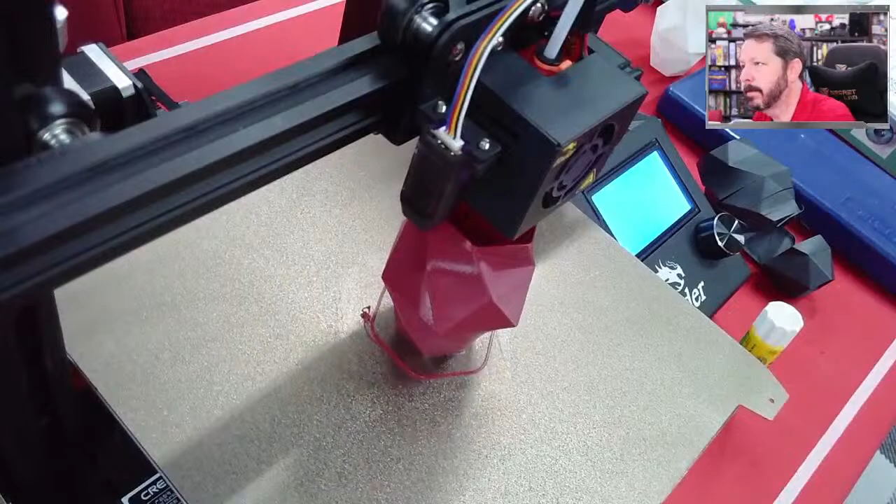So I did get out our new version—let's see, we can go back to this picture. I got our new version over here, and it printed much better. First of all, it's much darker. So it printed this guy—I'll get it over here so you can kind of see. Right now we're printing that, so that's what it looks like.

Really nice. Now, I don't know if you can tell on here—yeah, you can tell right there. So these first couple of layers, I don't know if I can get it to focus on that particular part or not. Maybe. I printed it at the hotter temperature.

One of the things I originally wanted to do was print hotter, because I thought this material needed to go up to 260 or 270, and the other material that we had printed was at that temperature. This is a different version.

Let me see if I can find the box—oops, sorry, we'll have to get our camera. There we go. That's the name of this carbon fiber polycarbonate.

And when I got to printing it at that hotter temperature, it was printing, but it's rough compared to this temperature. I wish I could get it to focus more cleanly. There we go—now I'll have to refocus it later, but this temperature here is 240. So you could print that on a standard Ender 3. It's at the upper end of what you could do, but you could print that.

Now, I put some—I think I put them on canvas. I'll have to go back and add them to the YouTube description, or maybe put them in chat. I'm not sure. Let me see if I can grab the settings I used.

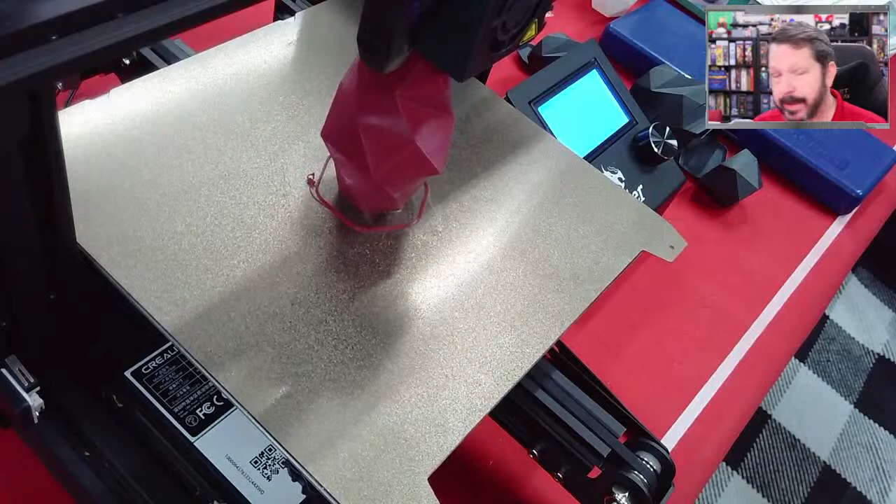I'm not going to do that just yet, though. For one, the printer's still going. But I do want to go in and do the Fusion stuff. I want to do that first because, let's see if I can get it to pull up. There it is.

Because if I don't do that first, it does take some amount of time to generate its solutions.

All right, printer finished also, so that's not so loud now. We'll go ahead and turn it off. Actually, no, let's not turn it off because we're going to have to get that filament out. We'll go ahead and yank it off out of there. We needed the filament out to be able to change the capstan on the feeder.

All right, so now back to Fusion. It does take some amount of time.

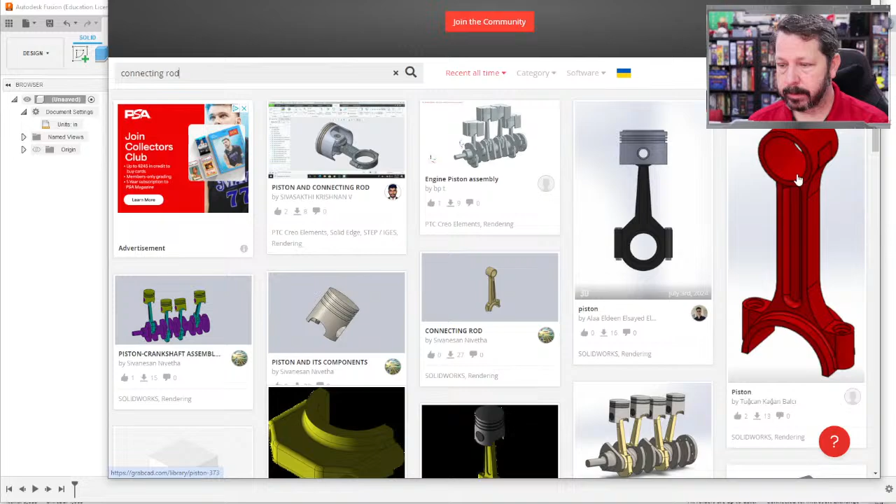So in SolidWorks, we did topology optimization on a connecting rod, something like one of these, this red piece here, just a picture from GrabCAD. So basically we made a bulky looking connecting rod, specified some features that we needed to keep, and let it do its thing. SolidWorks runs all that locally, and it finished in, I don't remember, 10 or 15 minutes, somewhere in that time frame.

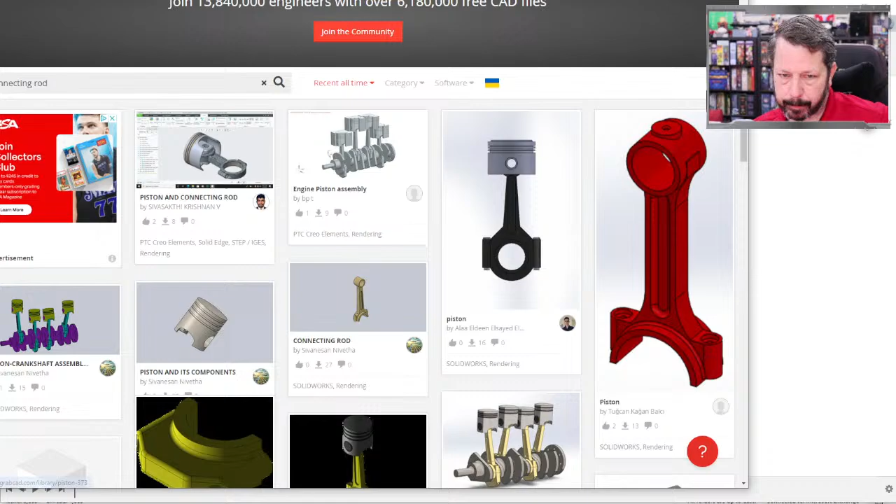Fusion is going to do a similar thing, except that it is going to send your data to its cloud. So I assume it's using an Amazon Web Services type thing.

If you have the education license of Fusion, which you should be able to get if you just have a .edu email address, so you might have to apply for it, then so far I've had unlimited access, tokens basically, so I didn't have to pay for any of these simulations in Fusion. But if you don't have the education license, then there's some real cost you have to pay to do some of these simulations. I don't know what the cost is because so far it's been free. I don't know how long that'll stay, but today it was, or this morning it was.

I assume it will be when we do this again. All right, so it's generally the same idea, except that you can actually make it almost exactly the same idea and give Fusion a starter geometry like we did in SolidWorks. But we're going to avoid that part of it and just do the generative part.

So maybe you've never used Fusion before, but this is the screen you start with, and what we want to do is, I've got my little notes on what sizes we made things last time. So I've switched over the units here in the document settings to inches because the default is millimeters, and we did everything last time in inches. Just to make it easier, I'm going to switch the unit system to inches.

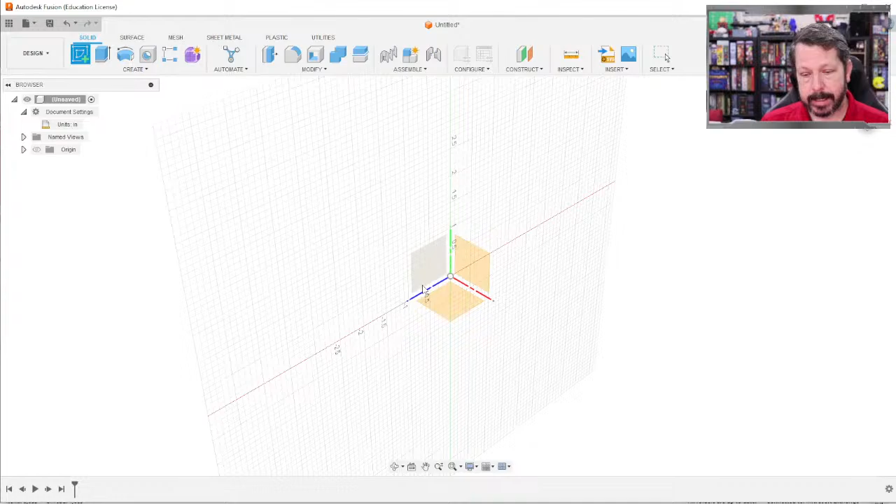So we're going to create a sketch, much like you would do in SolidWorks. You've got a similar setup here, your three planes, maybe they look a little different, but it's the same idea. And then you've got the same types of tools up here for sketches, lines and circles and splines and all that. So we're going to create circles.

And this one, let's see, D is dimension here. So this one is going to be the inner size of the big end, which we set at 2.1 inches. Then we need to remember how to move around in here, get off of there, draw a circle. We're going to draw the small end, and I did it at 0.9 inches, and we did it 5.7 inches apart. So I remember those.

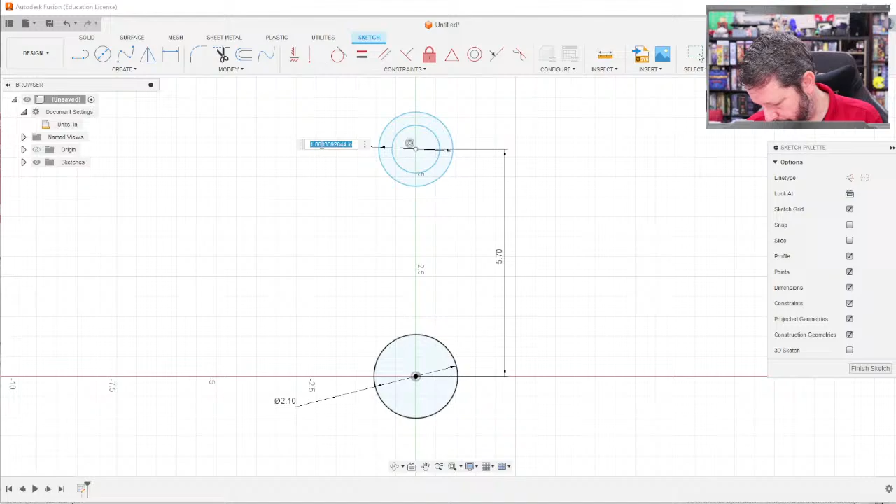I'm going to go ahead and draw some more circles. So we need one here that is basically the thickness of the wrist pin area. I don't remember the exact dimension I made that, but let's just say I added half an inch to the total. So if I did 0.9, then that would be 1.4 inches. That looks awful thin.

Did I ever make this one? Oh, I never made this one at 0.9. That's why. Okay, there we go, that looks better. Let's do a similar thing here. Maybe we need this one to be a little more beefy. I made it at 2.1, let's add half an inch on either side. I don't know if that's what I did last time, but that would be 3.1. Oh, I need to set it first. There we go.

Let's cut off the bottom part here because we don't need that. I'm just going to draw a line there, and then we'll trim. Whoops, we'll get rid of the line there. We'll trim off that stuff, and that stuff, and that stuff.

So one thing I like - the very first CAD software I used was AutoCAD 10 or 11, something like that. It was a long time ago, in 91 or 92. So I learned a lot of the keyboard shortcuts - a circle is C, a line is L, dimension is D. They're not hard to learn, they're pretty obvious, and all of those transfer over into Fusion. So if you know anything about AutoCAD already, you'll know a lot of your shortcuts.

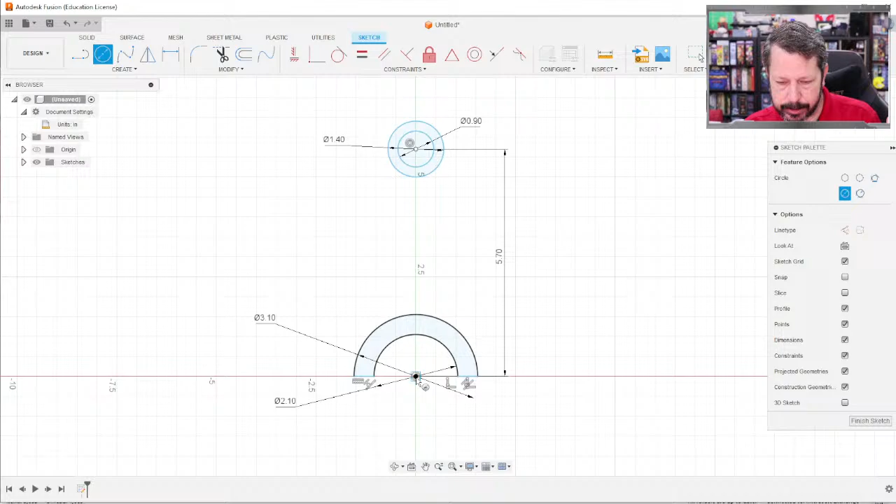I just realized the way this is going to work, I actually do want a circle here. That's a function of how Fusion is going to do the generative design. So I do want a circle there.

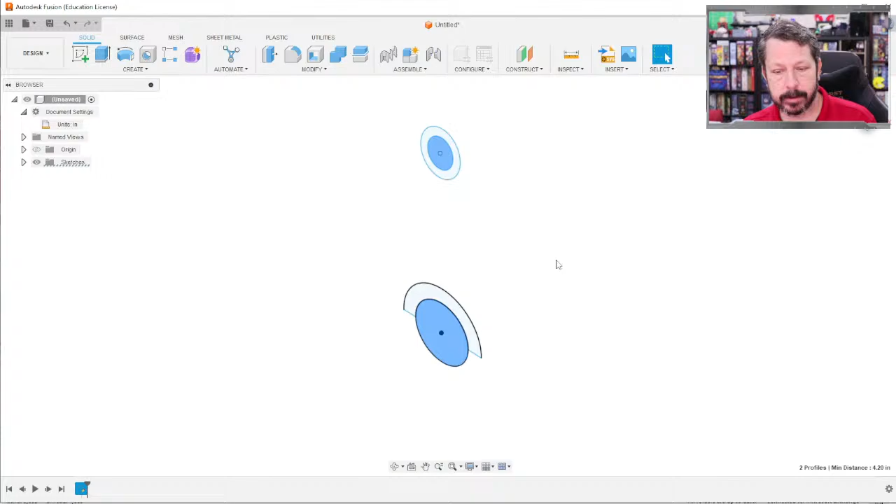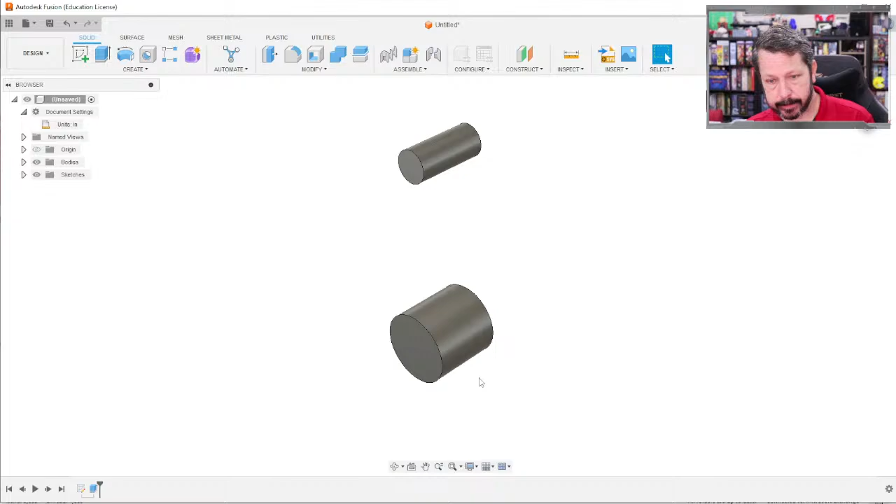Let's go ahead and finish these and make these into bodies, not just sketches. So this one and this one, these are going to be occlusion zones - I don't want material here at all. So I'm going to hit E to extrude these, two-sided, an inch in each direction should be fine. So these are basically going to be volumes where the generative design is not allowed to put material.

I need to get that sketch back because now I want these guys - I want these to be like, you have to put material here. So I've got the wrist pin area up at the top, and then the bottom half of the big end - I need some material there.

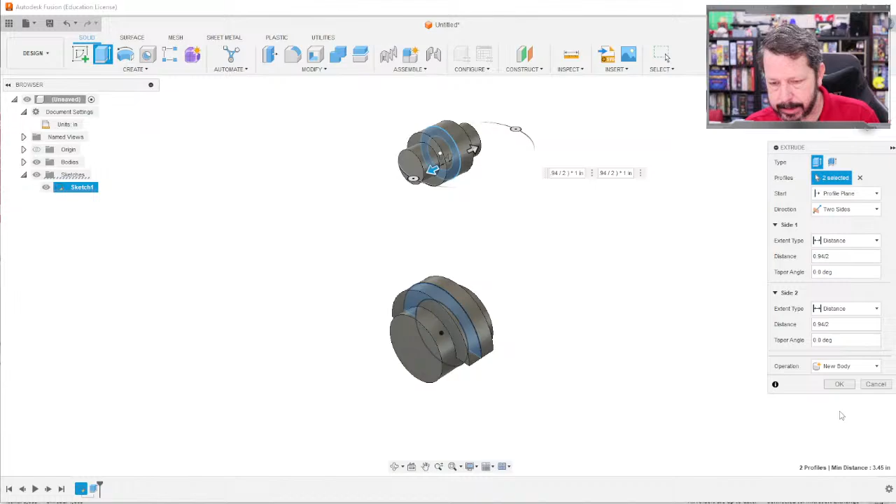So I'm going to say that these are two-sided, and I want them - I made them 0.94, so I want half of it on each side. I'm just writing the equation 0.94 divided by 2 on either side. I don't want this to be joined though - I want these to be new bodies, or I could do new components. And then we can turn that sketch off.

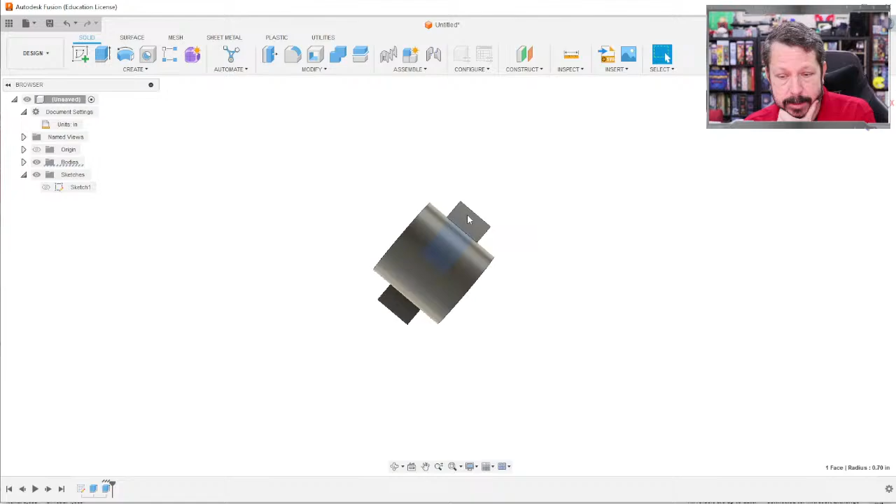So now I've got some volumes where you have to have material and some volumes where you can't have material. I think the other thing I added to our other one was that we do have to bolt the end cap on here, so we made some bolt holes. Maybe we'll do that on this one too.

Let's just make it really simple - we're going to create a sketch on here. Okay, it's going to rotate it around that way. And we'll put a... let's see, drive it from the center. I wish it would grab the edge of that.

Oh, okay, let's see - got to remember how to do this. Create, include - I want to include that line in my sketch, and that line in my sketch, so I can get the center point of them. Alright, so now when I create a circle, I can actually find the center of that.

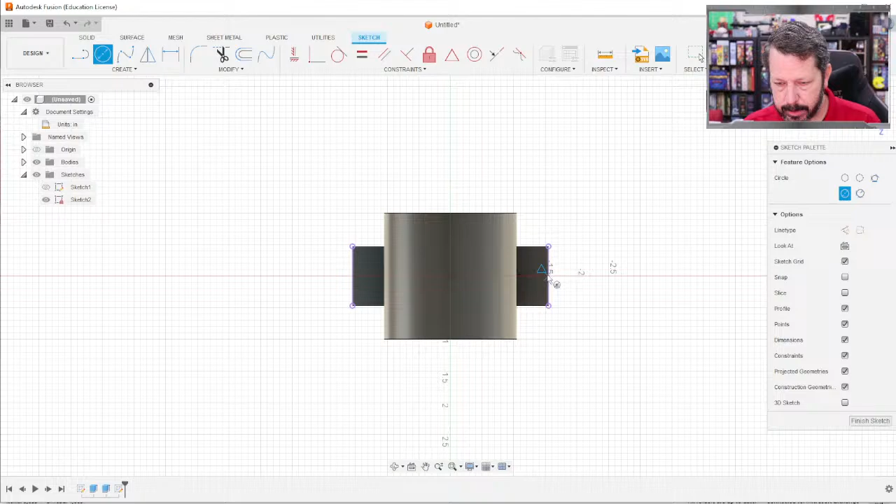There. And there - now I've got the little half circles. That's fine, I probably should have gone ahead and made that. We'll come back and make the... oh, did I finish? Oh wait, extrude.

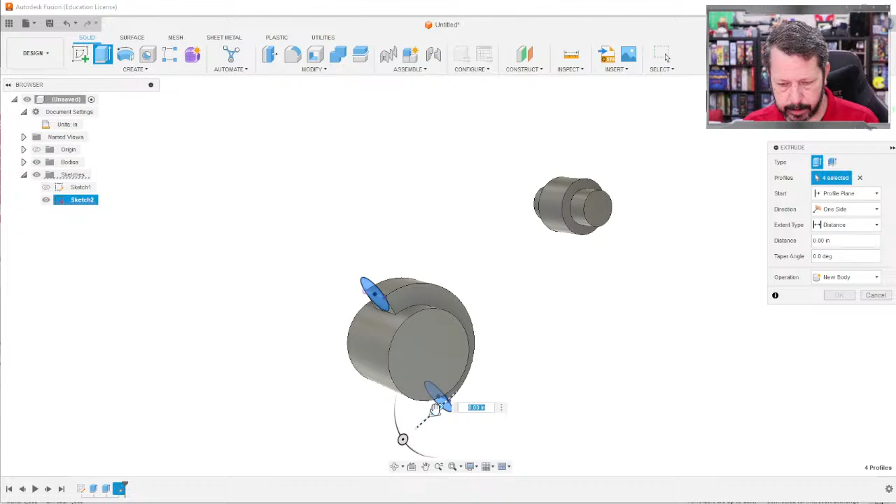We'll come back and make the holes. We'll extrude this, something like that - but this is not going to be a cut, it's going to be a join. We don't want that to be a new body, we want it to be part of that one.

So, okay, now let's go back and let's put the holes in there. We could have done that at the other step, but I didn't. So I want to find the center - oh, a circle. And we'll scale them here in a minute. Where'd the center of that one go?

Well, I can't find the center. I'm going to have to force it to do that. There we go. All right, so we want these.

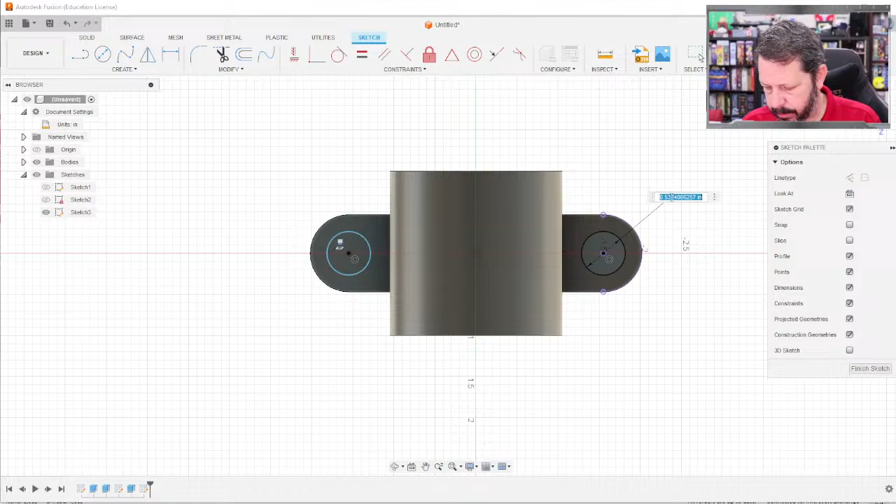Let's make them - I think I made them a quarter inch. No, that looks really small. Did I make them a half inch? Sure.

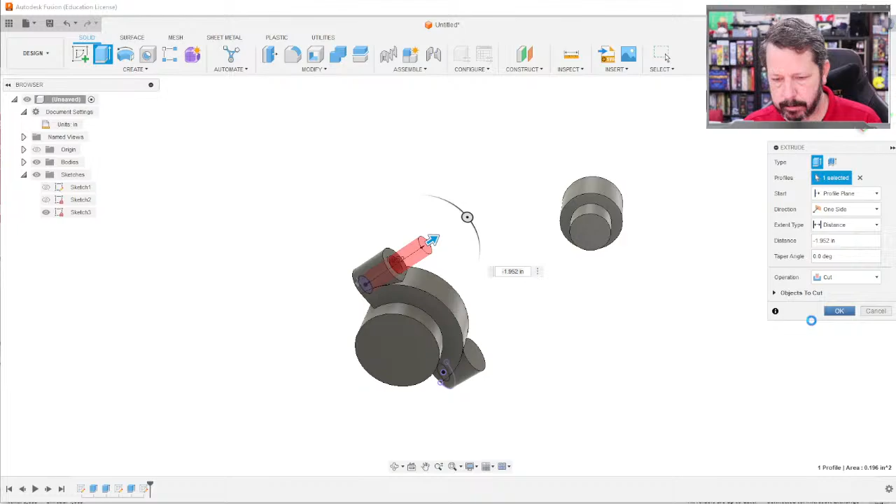All right, and then we will pick those guys, extrude them through there, cut them out. All right, oh, did I not select? Ah, I think I didn't - somehow I didn't select that one. There, we got it.

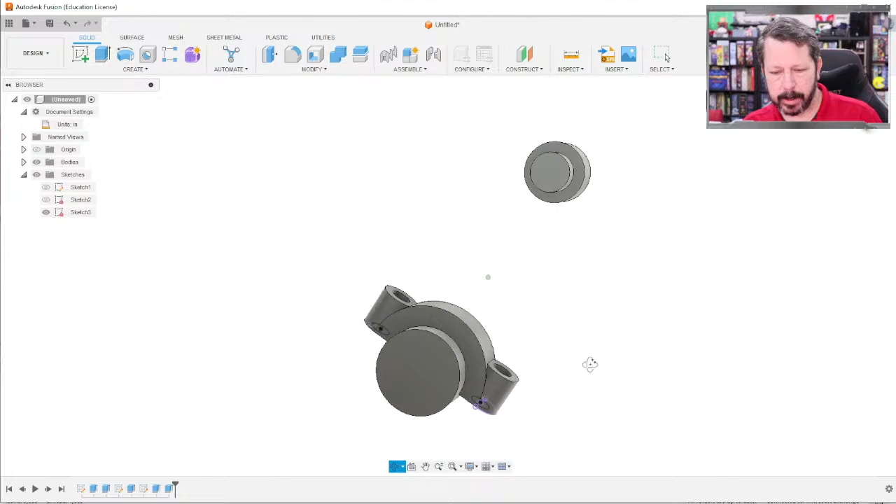There we go. All right, so there's our starter geometry.

Assuming you've got the education license with the full set of packages, there's a simulation thing in here, manufacturing, animation, rendering, all kinds of stuff, but there's one called Generative Design. So I'm going to select that one. It asks if I want to generate a structural component or some kind of fluid path for a heat exchanger. We're going to do a structural component.

Okay, so it brought in all the geometry I've been working on. You can look at it one of two ways. Over here in the tree, you just walk through these steps, or across the top you can walk through the steps left to right. I guess the guide will either turn this on or off.

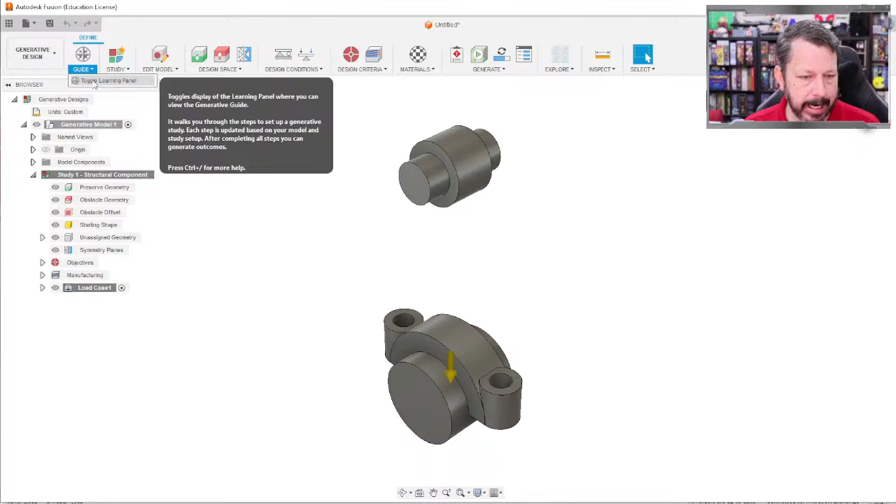So we've already set up that we want a new generative study. Let's look at the settings. All right, so you could have a higher or lower outcome. We'll leave it in the middle for now, because I do want to see the results sometime during the stream. We could go in and edit the model in any way, but we've just done that, so we don't need to do that.

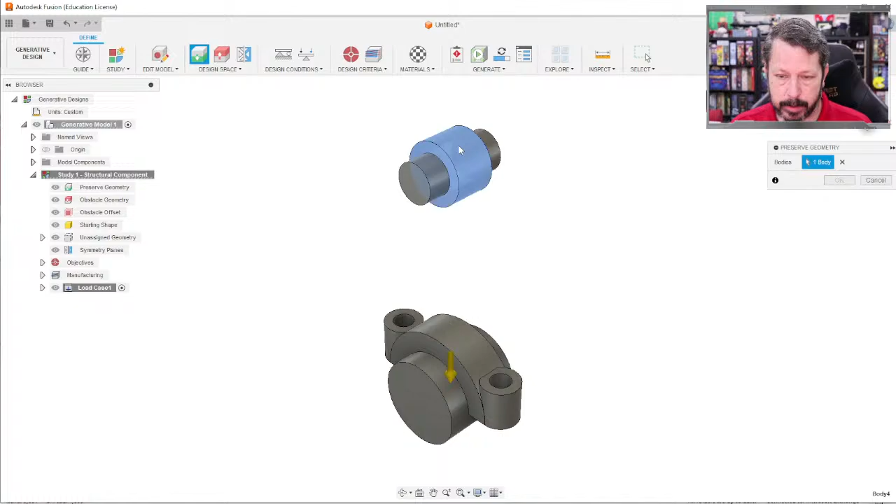So preserve geometry: are there any pieces of geometry we've made that have to be in the final result? Yes, we want that body and that body. We have to have those because they're part of the design. We didn't do any filleting or anything like that. We probably should, but we're just trying to keep it simple.

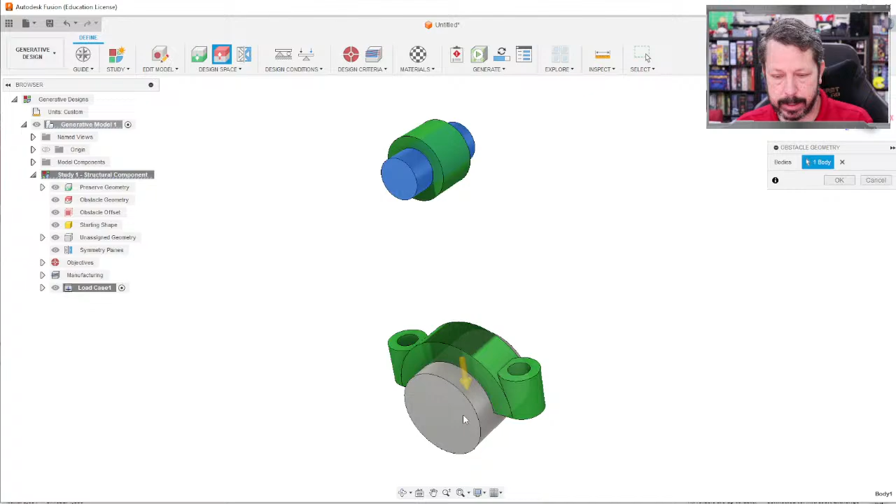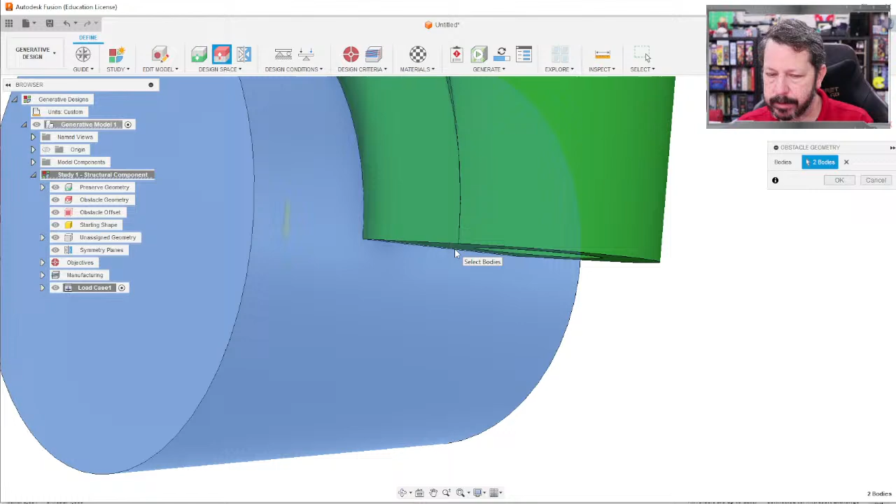So they'll turn green. Obstacle: are there any things you have to avoid? This guy and this guy, there cannot be material there. Also, I should have made it so that bottom surface can't have material on it. I really should have added a little platform here so there's no material below this line. Hopefully it won't try to generate any there, but I don't know. We'll find out. I probably should have put an obstacle there, but I didn't.

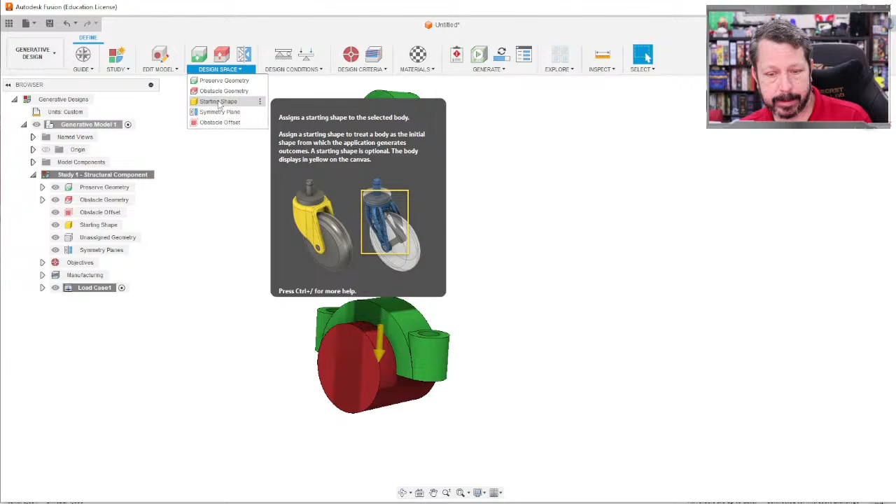In SolidWorks, we had to build out a blank sort of shape and then it ate away at that. I could give a starting shape here, other than what I've already drawn. I could have something between these and kind of want it to look like this and work on that, but I didn't do that, so we're going to leave off the starting shape.

Do you have any symmetry? Symmetry will speed up your solution and control that your part is not asymmetric. So I do have symmetry planes, I will have to show them though. There's going to be one there and one there, so I'll have a quarter model symmetry. That's the same thing we did in SolidWorks.

Obstacle offset: on these obstacles, is it that I can't be in that volume, or I can't be some distance away from that volume? In this case, I've made them the exact size, so I don't need to offset the obstacle.

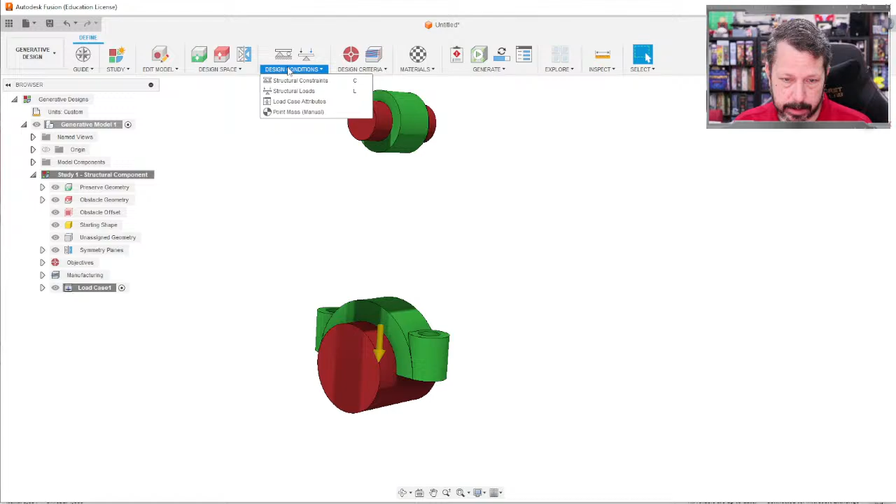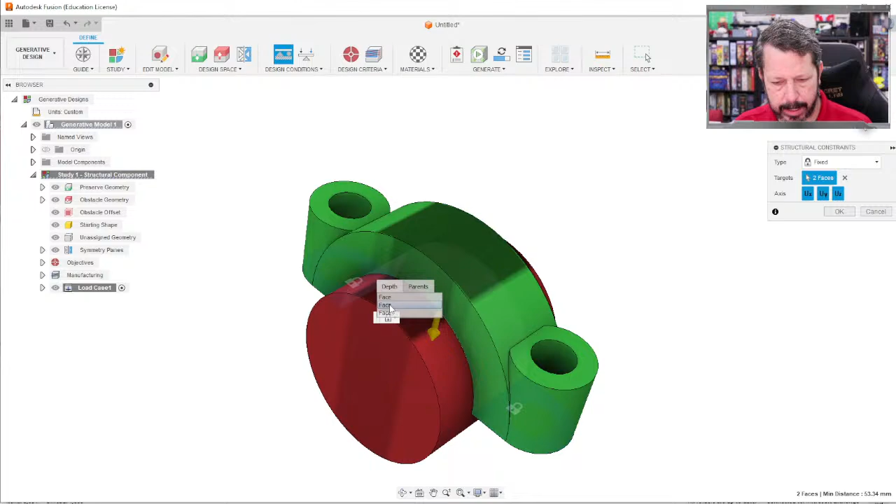Constraints: our big constraint will be that surface, and we got to pick this surface in here, which, oh, I had it. I know you can select more faces, I don't remember... there we go. Just hold down that one. So if you hold down the select button or your mouse button, it will let you select the one you're trying to get. Those surfaces are going to be constrained X, Y, and Z. They can't move, they're fixed.

We're going to put a load, and I probably should have put a split plane in here so I'm only putting the load on the bottom part of this surface, but we're going to put a load on that surface and make it go downwards. I don't know why we're in newtons, but let's change units to pound force. We put 10,000 pounds on the SolidWorks version, so let's put that here. And then if it's at an angle or anything, we could adjust that too.

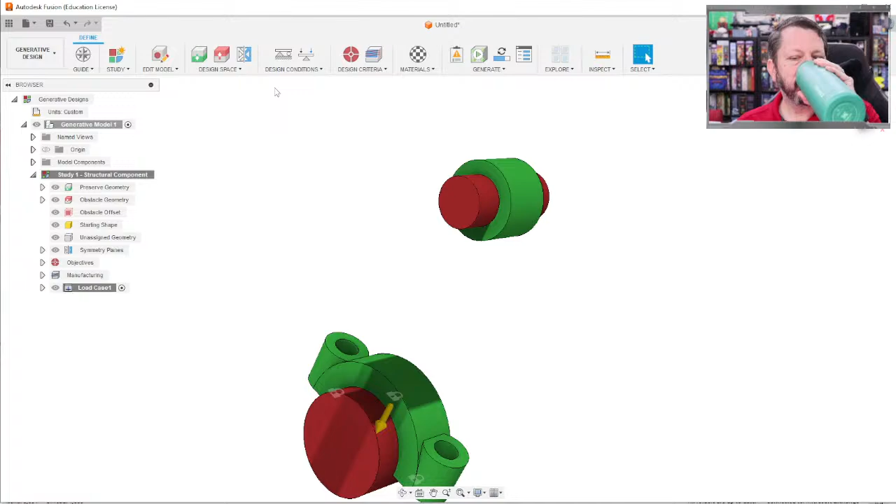I don't need either of these. So what are our objectives? Do we want to minimize mass or maximize stiffness? In SolidWorks it was kind of the ratio, the stiffness ratio. So here I have to choose one or the other.

I'm going to do minimize mass. And then if I wanted to avoid some frequency, or find some minimum first mode frequency, which is probably important in the connecting rod, I could do that. Or some minimal amount of displacement, I could do that. Avoid buckling, definitely want to do that.

So you could select as many of those as you want and give them their own criteria. We're just going to say minimize mass.

If I do maximize stiffness, I can also give it a target mass. Maybe let's do that, because that was one of our goals. I think we wanted it to be 0.35 kilograms, 350 grams, was our goal last time. So let's do that, and then keep the stiffness. That'll kind of do the stiffness to mass ratio, weight to ratio.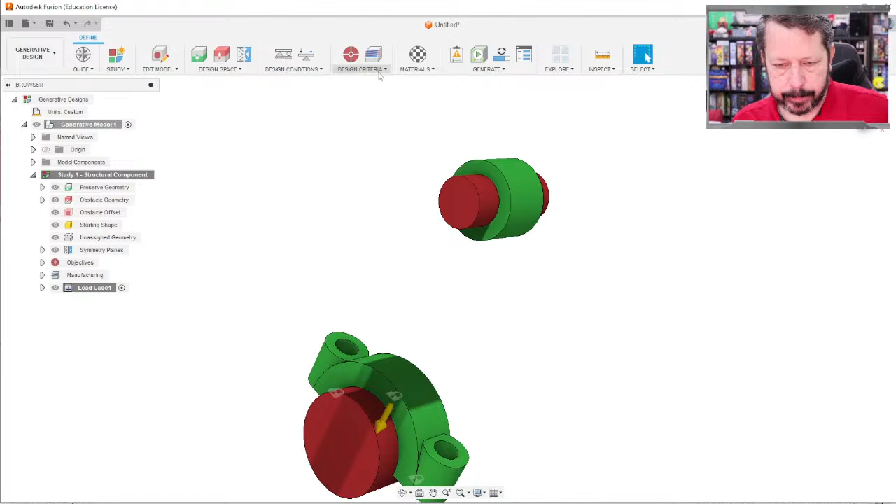Let's see, do we have any? Oh, manufacturing. So what it's asking us here is there are 3 types of manufacturing. Oh, well, I clicked off of it. Let's go back to it. 3 types, oh no, 4, because I can include casting.

So I can have casting, 2-axis cutting, so like milling from one direction. Cast something that's castable, meaning I've got draft angles and all that kind of stuff. Milling, but I can describe which direction I want to mill from, and I could mill from multiple directions. And then additive, so I could 3D print this thing in a variety of directions.

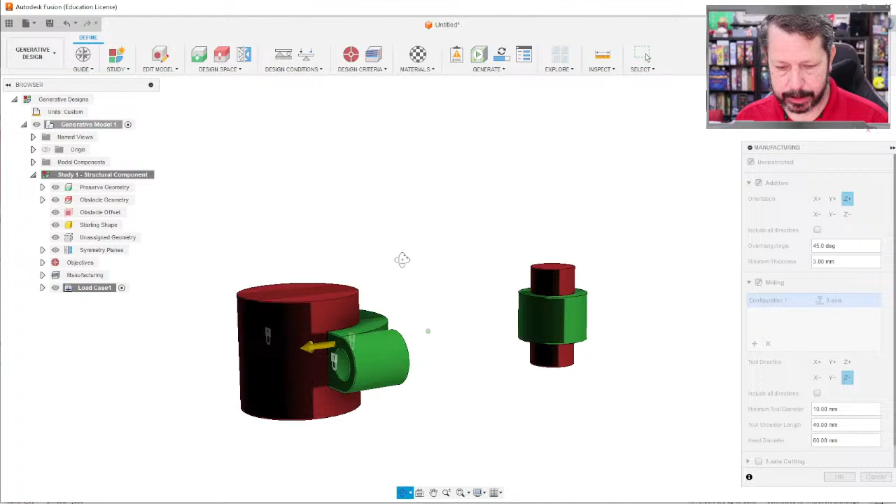Right now it's just Z, you know, if you look, oh, it's under your screen, under my picture. This would be the orientation where it prints it kind of flat. I can't get it to, there we go. It prints it kind of flat in the current orientation here, which would kind of mean it's going to try and avoid certain levels of support.

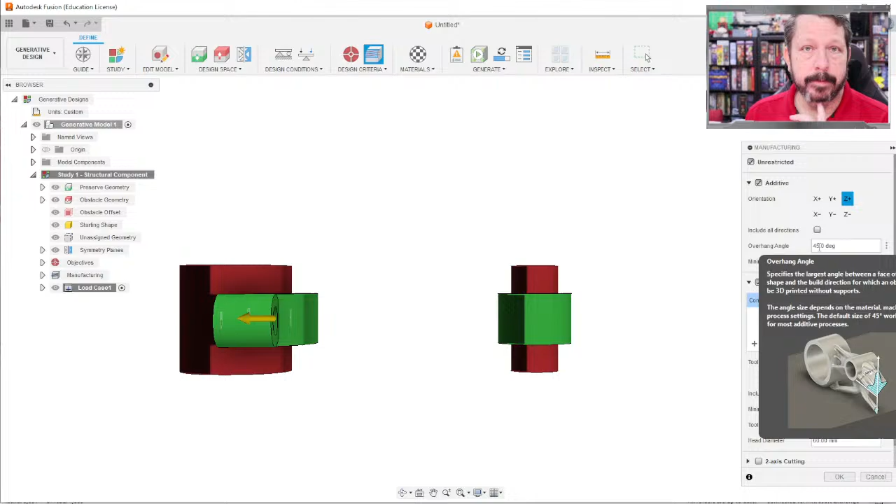So you see overhang angle here. You tell it what your maximum overhang angle is before it needs support, and it'll try to create a part that doesn't need support. You tell it what's the minimum thickness of any part you can resolve on your printer, and it won't make any features smaller than that.

So let's not do unrestricted, because that could give us a lot of things, but let's do additive, and let's do milling. Actually, let's do 2-axis cutting, so like water jet cut or something. We'll give it 2 different options here of things it can do. Actually, I want to see what the casting does, just to see.

Our minimum thickness on this is probably more than that, though. Hold up, huh, there it goes. It's acting really slow all of a sudden. Let's do a minimum thickness of 5 millimeters.

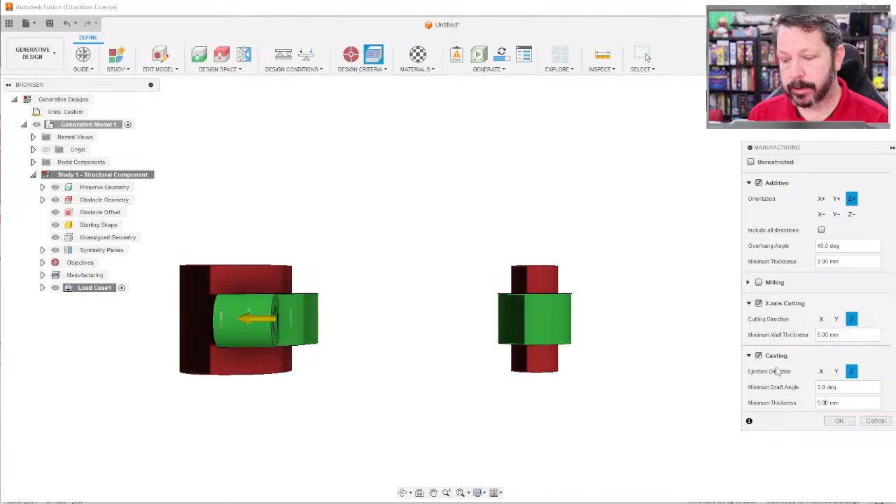Alright, so it's going to go through these 3 processes and try to create some geometry that's suitable for each one of those.

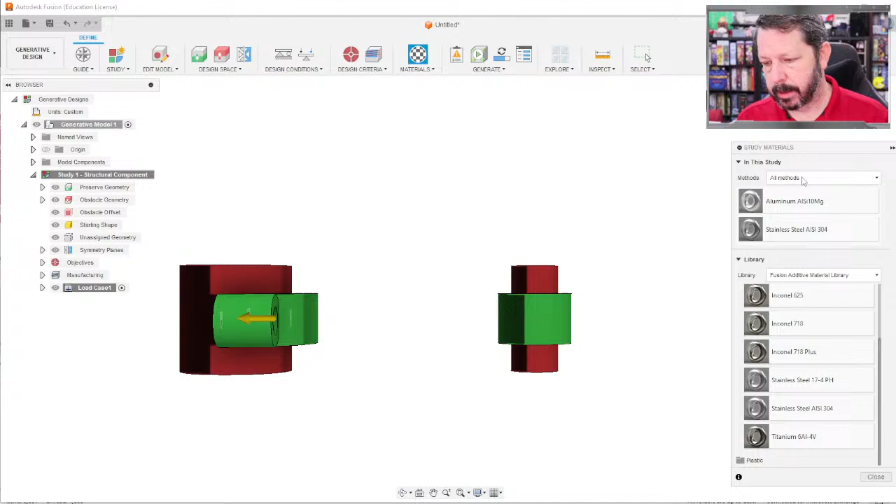We do need to tell it what materials we want it to consider. So all methods, they need to be metal, and let's put aluminum in there, and 304 stainless. So now, we could specify, oh, for this method only consider those materials or whatever, but we'll just do this. I don't want to make it overly complicated.

Now we go in here to generate, and it's got a little pre-check. Oh, 2-axis. All right, so, oh, you know why? Because I think it can't make these curves here. And I told it had to make these curves, but the 2-axis, these would just be flat.

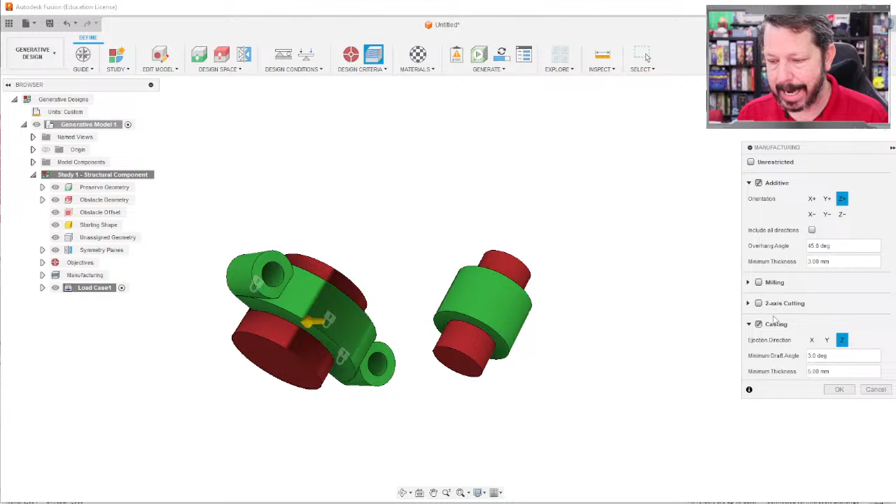So maybe let's get rid of the 2-axis, because we wouldn't water jet these. So let's go to manufacturing and just do casting versus additive. Okay, so it gave us a little warning. Pre-check says, okay, now we're good. And that's okay, we can do a preview.

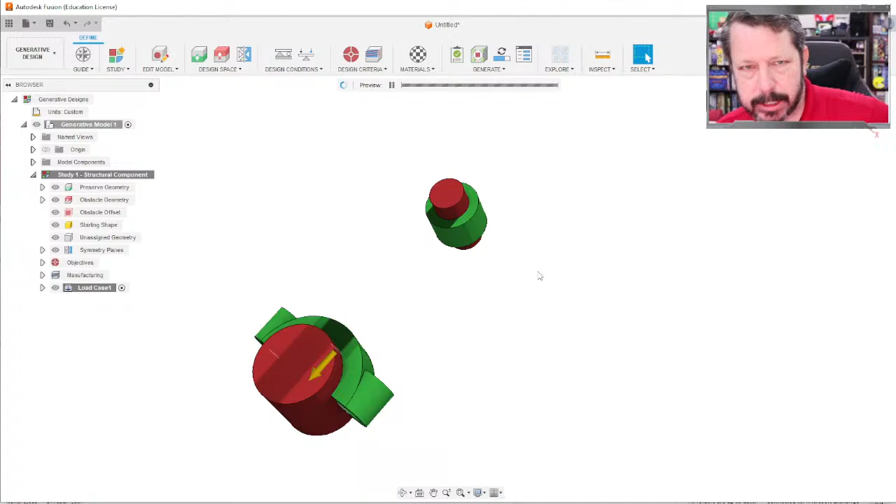I'll try to do a preview. So the preview runs locally, and it'll give us just kind of an idea of what we're going to end up with. I'm not sure exactly how long it's going to take to preview, so we'll see. If it takes too long, oh, okay, so you can kind of see there's its first thing. So basically, first of all, it just connects everything together, and then it starts eating away at it. It's iteratively running finite element analysis on this geometry.

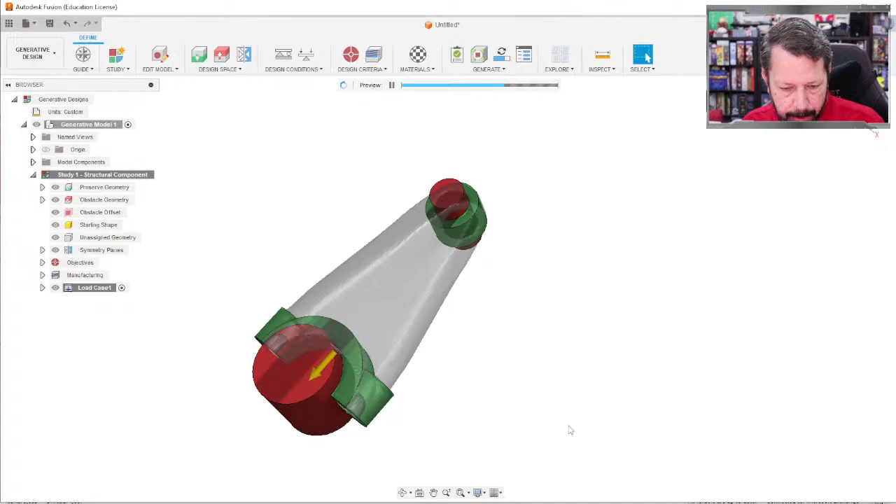Oh, you know what? I did notice that I told it to preserve this green, but I didn't tell it to avoid filling in these holes. So it might fill in these holes here, but that's okay, we could fix that easy enough. So that's kind of what its first pass is going to do. It did generate some holes in here, but it didn't completely avoid them.

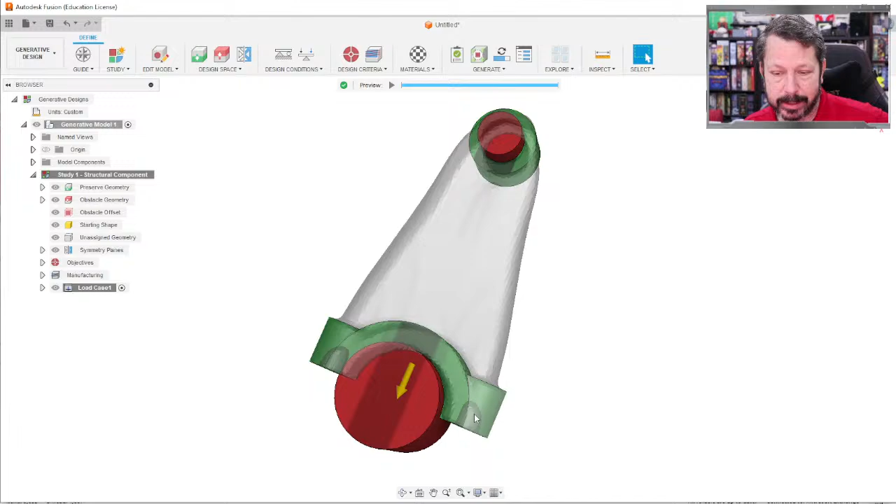So, you know, maybe let's go back. Okay, and let's go to our design. Oh wait, let's see, here's a hole. I want there to be start of shaft there, and I can only do one at a time, and end of shaft there.

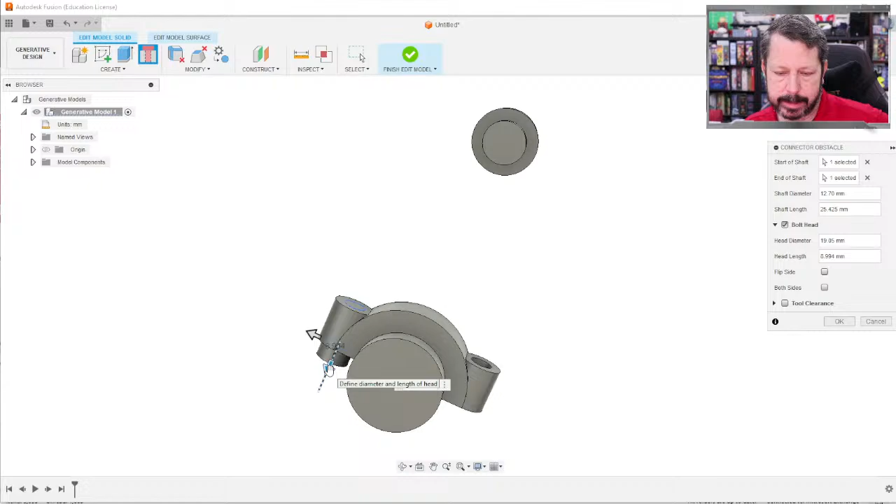And let's include room for the bolt head, but the bolt head will actually not be on this piece, so we'll leave that off. I haven't actually done this part before, so I'm kind of like, oh, okay, that looks good. Let's see what happens.

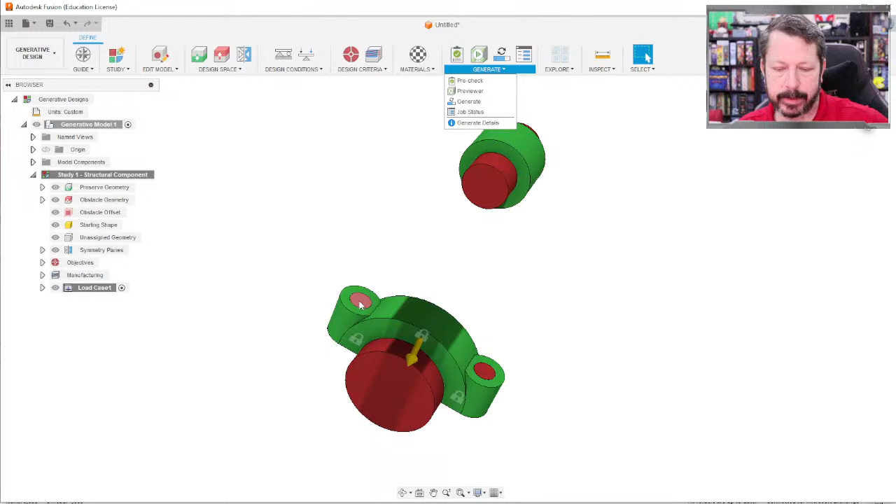I think I'm just telling it where I want a hole to stay. It kind of filled them in, not sure, and it filled them in red. Alright, so let's do our pre-check again. Okay, and then we will generate. So we could do the preview again, and all it would show is that it didn't fill in those spots. It might fill in over the top of them, though.

Let's see, generate. So here is where it is going to send this off to the cloud. It says it would take 11 cloud credits. I don't know how much a cloud credit is. Maybe we can do a little search on that and see. Right now I have unlimited cloud credits, so it'll be fine. So we'll generate one study, and this will be MEEN 432 con rod.

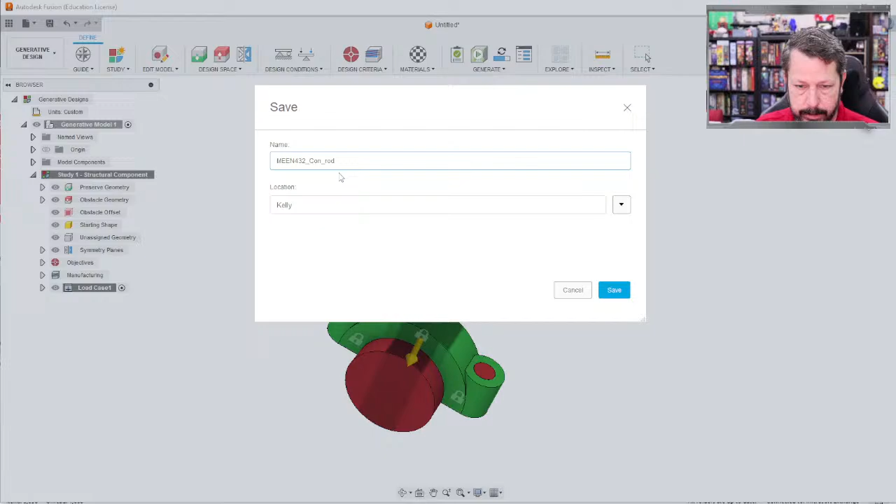Okay, and so we can kind of track what's going on here once it's satisfied that it can actually send this out. So it's sending, and then once it notices that it's successfully sent our design off to the cloud, then with all the constraints and materials and all the manufacturing processes, then we'll start having an update here. Right now it's scheduled, so under my picture it shows that it has started successfully, and you can see thumbnails will appear when they're processing, so that's good.

So once we get to some place, we'll close this window and get some samples of what it's thinking. So that's going to take a while.

So while that's happening, let's go back to the printer. Our little print, there's no particular reason I did this one. It was just an interesting looking material that I wanted to print, and that's all it did.

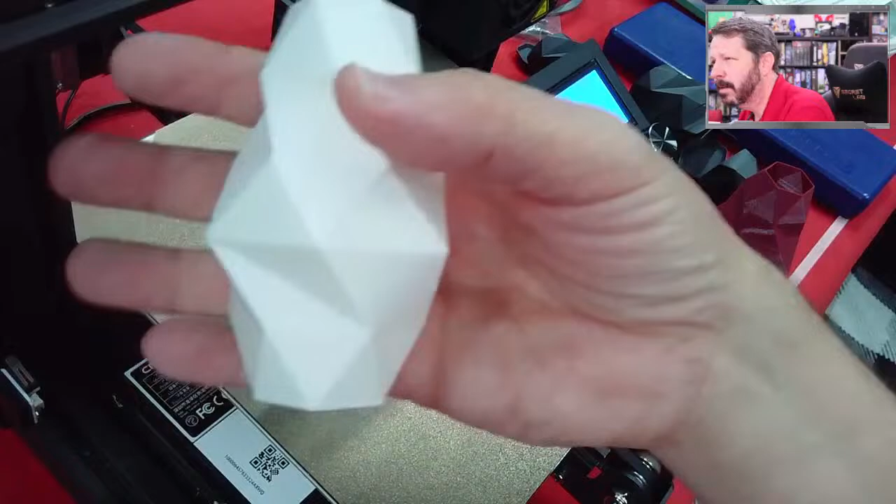That glue on there really is holding us down. All right, so that's just a PLA, just to print it. Interesting, oh here's another one. This one is a PLA. This one's gonna be hard to pick up. It is a polyester PLA blend.

It's wanting to focus way back in the background. I'm trying to get it to focus closer, but it doesn't want to. And it's also a pearl, so in person, first of all, it's really hard to see the layer lines on this, but you can kind of get an idea of the fact that it's pearlescent.

So this is from Toner Plastics, and it's a really neat material. The polyester blend in there makes it a little tougher, a little more flexible than PLA. PLA is a lot of times really brittle. So it's about $30 a kilogram, I think. You can kind of see the bottom, I didn't clear it out - that's some of our carbon fiber left in there. But it's a really, really nice material.

It prints a little bit hotter, although I think I printed this at 215, although I'm looking at the bag and it says it's supposed to be 230. So I printed it a little bit on the cold side and it worked fine. But it's a really nice material.

All right, back to this. Let's see, we need to get over to our capstan, the top of our feeder mechanism. Over here.

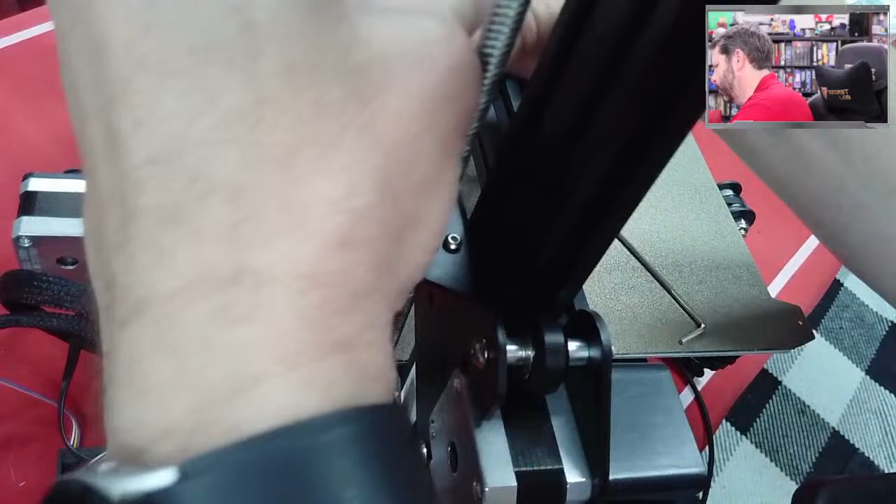Oh, that's too big. Maybe this one. There we go. There are probably replacement screws in our kit, but I'm going to hold on to these just because they might be ones I want. All right, so here, this spring has an adjustment screw, and it's like sitting on top of the one I need to remove, so I've got to take that out, which is the other size.

Okay, now I can get that one out. You may or may not want to take these completely out all at once, because that means the last one is holding everything up. There's one under this arm, and then there's one that's the pivot point for this arm. I got to take the pivot point out first. It's a little bit annoying to do because the Z-axis screw is right there.

You can't turn your Allen wrench very easily. We're also a little bit unstable here, just the way the table is set up. We'll see if we can get this to come out. You might want to try and get this spring out because that will loosen up the pressure on this guy.

Alright, so there's that piece. So notice here is one of the reasons - this idler is fine, but it's just passive. What we're going to replace it with is going to be geared to match. We're going to replace that pinch roller. It's going to be geared to match the pinch roller we're going to put on here so that they're both turning. This one is just passive, it's just applying pressure to keep the filament against the roller there. I have lost the right size Allen wrench.

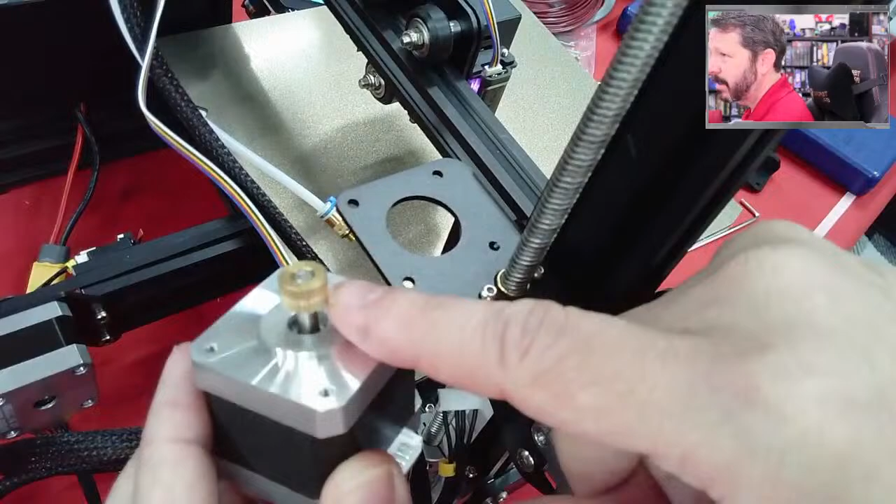This on a lot of the printers lately is either a press fit or a shrink fit. It's really tight though, so I'm going to have to use my little puller here. I'll see if I can. I got this off of Amazon. Let's see if I can find it for you, and I'll show you - I showed it last time, but...

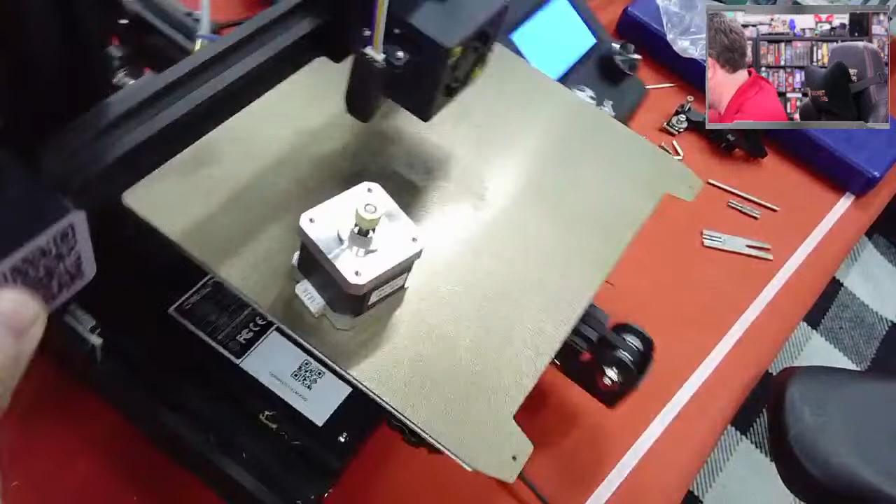All right, let's see. Maybe if I turn this around. So this is going to go in here, and I have to put this little guy underneath there, and then it will kind of do that number. I'm trying to get it centered, the little plunger centered on the shaft so it's not off.

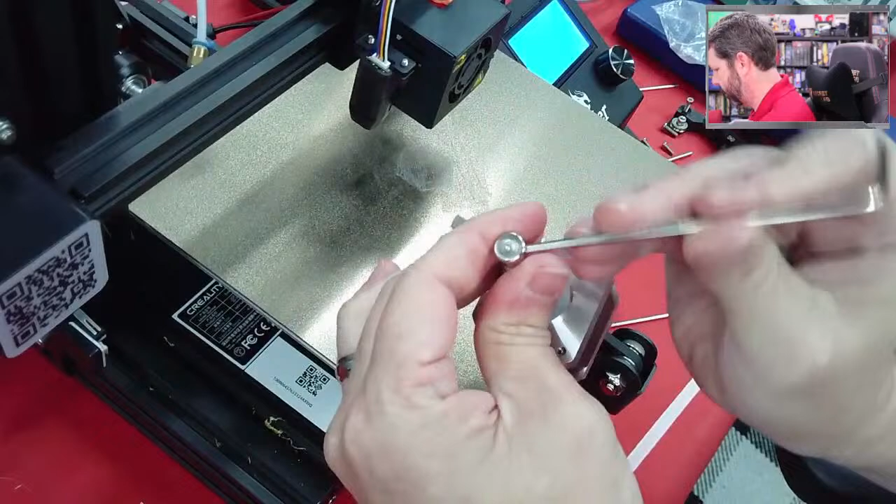Alright, so now we have to basically tighten this. It does come with a little rod here, and that's fine, but it's usually not possible for me to apply enough with this amount of leverage. So I usually have to get something bigger. I guess that one's too small to be able to have enough mechanical advantage to turn this thing.

And I usually end up bending the Allen wrench. So it's going to have to be off screen a little bit because I've got to get a lot of torque on it to do it. And you have to also hold - if you just turn it, then nothing happens. So you have to hold this and turn that at the same time, and that's not easy.

Let me see if I can find something that's going to help me with this. I might have to take it to the vise over there to be able to do it, or at least to break it loose. Let's see, I might put it on the floor.

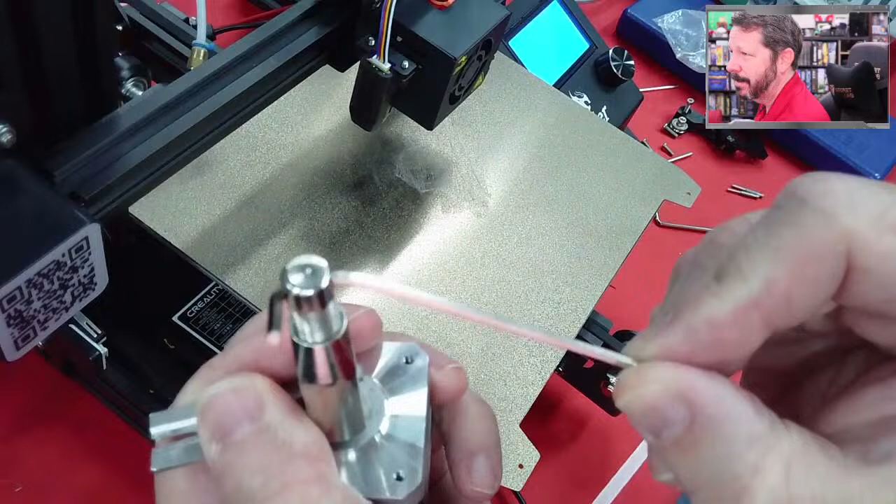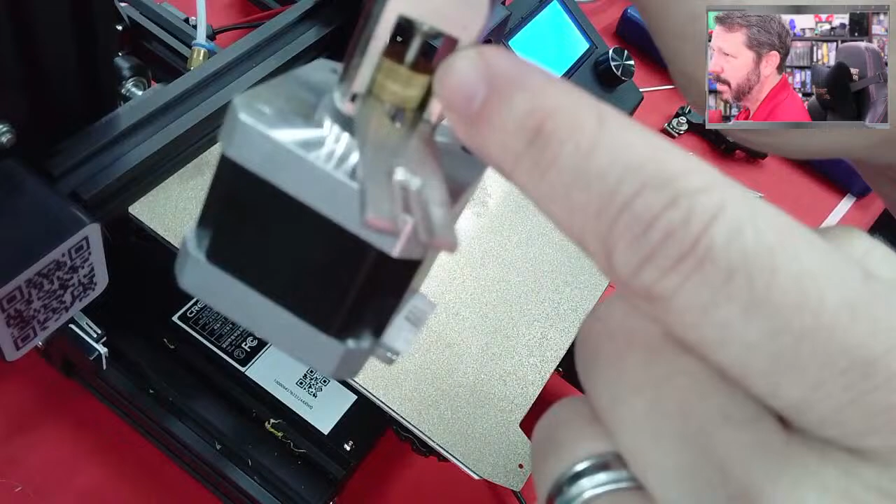So, still haven't gotten it loose, but let me show you what usually happens. I might have to get a little bit more leverage. I'll go over to the vise, try to break this thing loose, and then once I get it broken loose, I'll come back. Also make sure that your pin in the center here is not on the pinch roller you're trying to pull off of there, because if it's on it, then it's just pushing against itself.

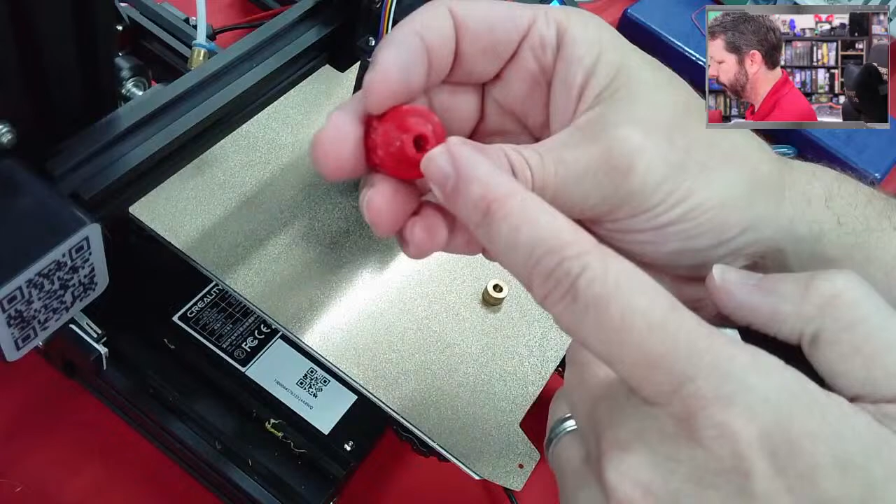So now what? We've got our new set of stuff here. Now this one does come with a little hand knob that you can put on here, but I never use it, for one thing they're set for a D, like one that has a flat on here. This does not have a flat anywhere on it, so that's a downside. Most of these little drive wheels are held on with a set screw, assuming there's going to be a flat for the set screw to sit in, but these do not. They're completely round shafts, so that's one downside.

Here's our top piece. There's our roller. If we need to reverse the direction, there's that. And then here's all the little pieces that we get. So I'm going to put all these pieces in here so I don't lose them.

Okay, here is our actual—that's why I wanted to put them in the box. Here's our actual new drive wheel. So it's going to have to go on here, and it does have one set screw. It's already kind of tight, and they did give us an Allen wrench that will fit that in case you didn't have one.

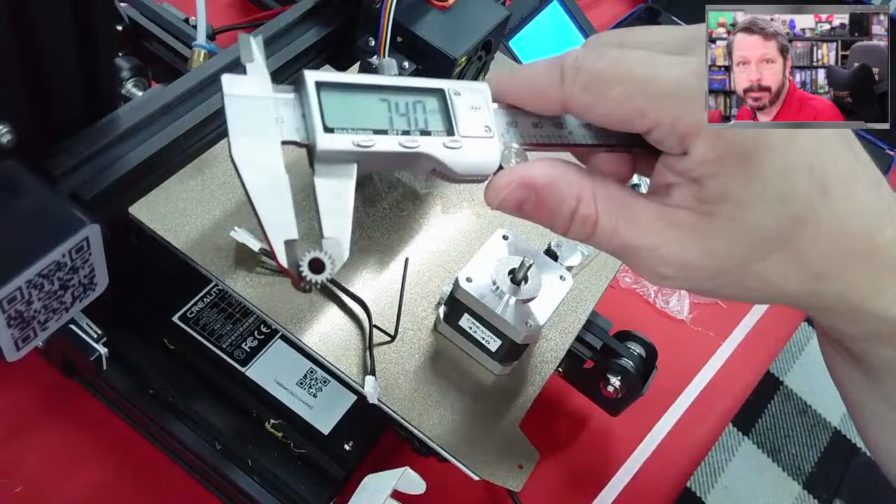So I'm going to measure this diameter, because the way Klipper does E-steps, it doesn't do E-steps—it does rotation distance. And rotation distance is how far an axis moves when the stepper controlling it moves one entire revolution. So basically, rotation distance for the feeder is going to be the circumference of the drive wheel. So it looks like we're at 7.39, probably 7.4 is what it's supposed to be. So 7.4 millimeters is the diameter. We can use that to calculate the rotation distance. Let me write down 7.4 before I forget that that is our diameter.

Okay, so we'll use that in our configuration file in a minute. Let's see what else we have in here.

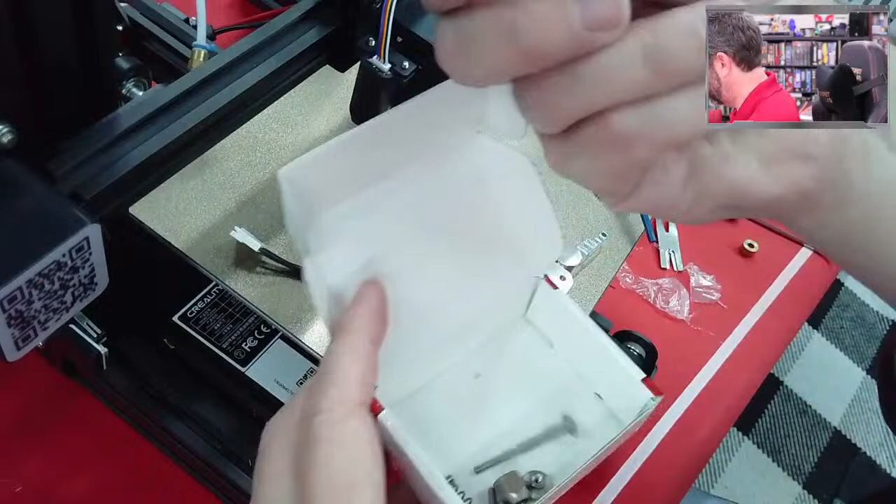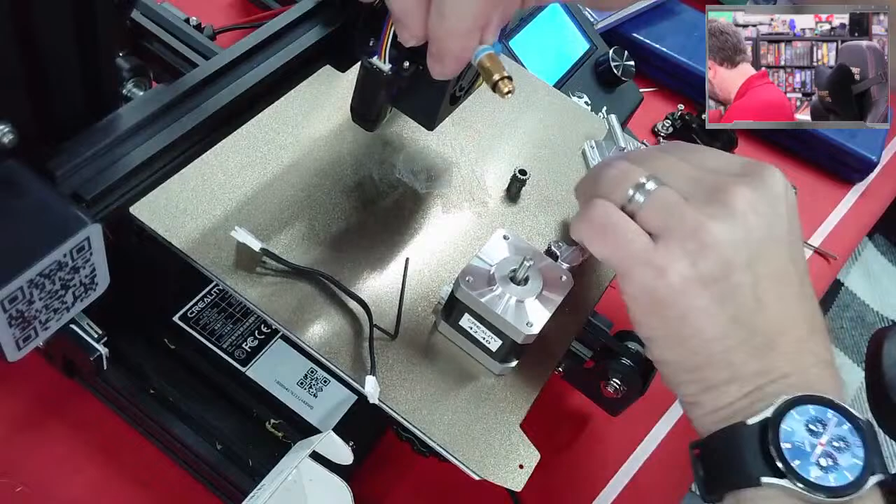We have springs. We have some of these little guys for our Bowden tube. Looks like this is going to hold the Bowden tube onto our printer. Originally we had one of these, which is not going to match up there, right? So we've got to get this guy off.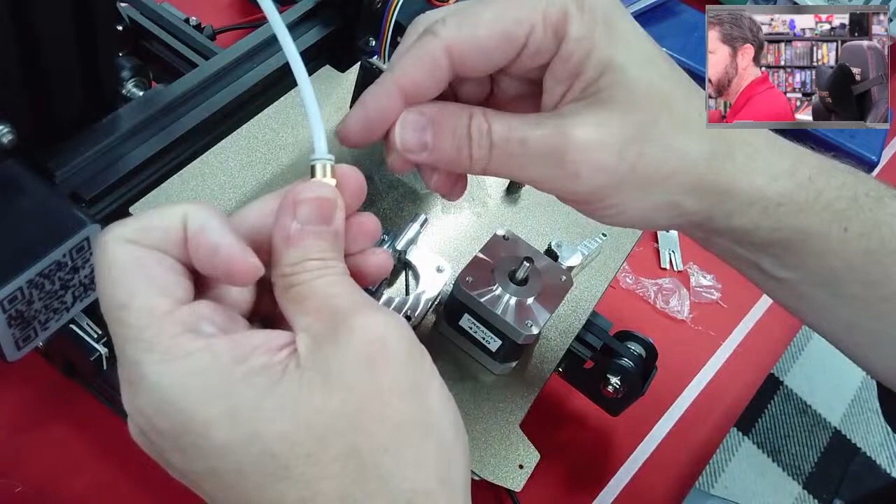Sometimes it's easier just to cut here, but let's see if we can pull it off of there. All right, so it did come off relatively easy. Sometimes there have been so many little burrs on our Bowden tube that you can't get this to slide off, but that time it came out pretty easy. Okay.

Let's see, I'm seeing one other—oh, this odd looking one is our hinge, so it's going to go in here, right? And then there's another special one—well, it looks like there's three special ones. And it doesn't matter, they're all the same. But usually there's one that is countersunk so the hinge can clear it when it goes over it—but they're all countersunk on this one.

All right, so let's rotate this back around and put things back together.

Let me check on our—oh, we've got one still going, but a lot of our studies have completed. Some of them converged to an actual solution.

All right, but let's finish up this guy. So here, you do want to keep track of this plug so that you're not having to wrap your wire around if you put this over here—that's annoying. So try to make sure you put the plug in a convenient spot, which here is probably the most convenient, although you could say that way is also convenient.

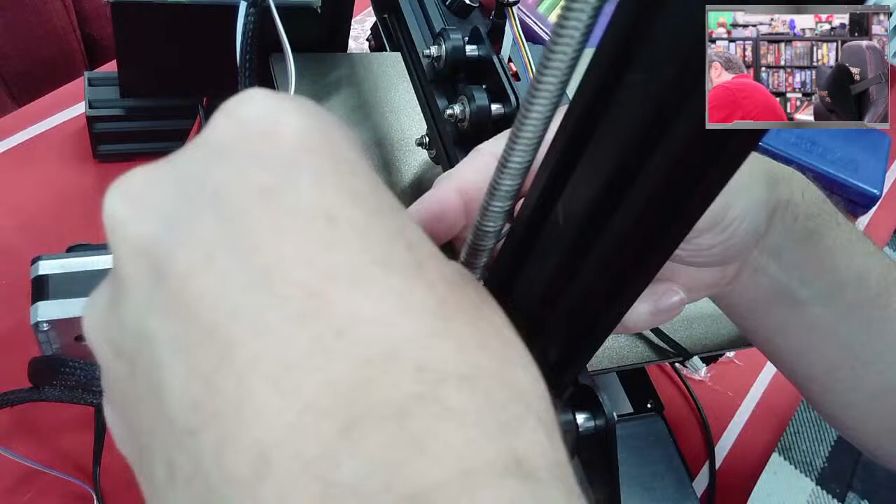All right, so we want to get these lined up with each other, and gotta find where that set screw is, and tighten down this guy. Okay, no, that's too high. There we go.

Okay, let's tighten our hinge now and make sure that everything's still lined up. It looks like it is. We need our spring in there. So our spring is these three pieces.

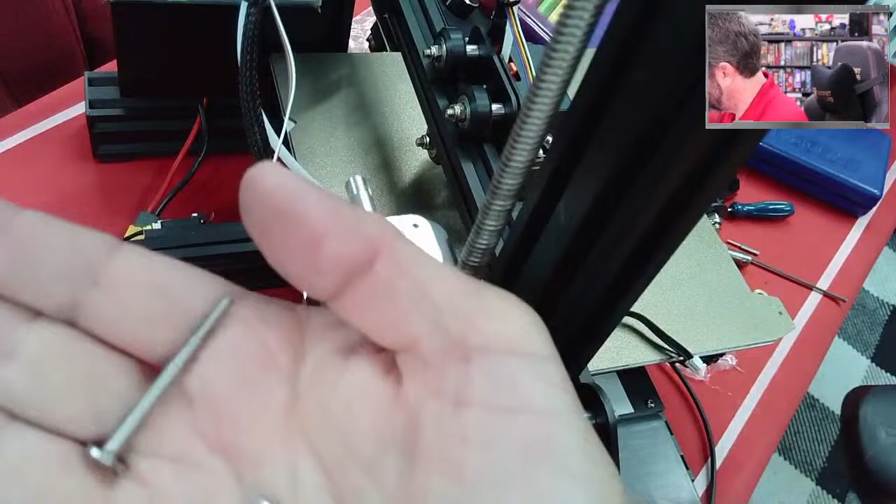And this one works differently. So the spring, oh no, is it gonna not clear? Oh no, it did. Good. So the spring actually sits on this side, and the little thumb wheel to tighten it sits on this side.

And in general, you can tighten this to have more pressure or less pressure. In general, if you have it where the thumb wheel, the screw that's in the spring there, if that end of the screw is about flush -- I've got it a little bit more than that, it's a little proud. If it's about flush, then that's a good starting point.

But if you need more compression, you can tighten it up more. If you think it's really loose, then you can tighten it. If it's really tight, then you can loosen it. So I just use it where it's about even. But to load filament, you'll have to actually pull this one, and that will pull this wheel away from this one.

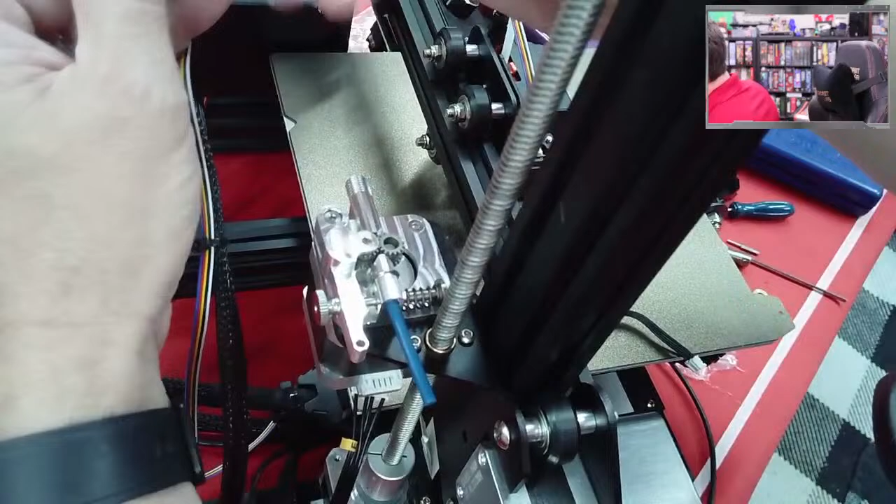Okay, we need our fitting here now. So this little guy is going to go on. Oh wait, first that little guy is going on. That one, and this is going to go.

Now you're not going to be able to see this very well, but you can push this in too far to where it gets chewed up by the roller here. So try not to go too far with it, and then we just tighten it down.

You want it as close as you can get it, and I think I could probably -- there we go. Okay.

And I had that big wrench. Here it is. I think, oh, it's so close. Well, for now we'll just hand tighten that, but I do need to go back and tighten.

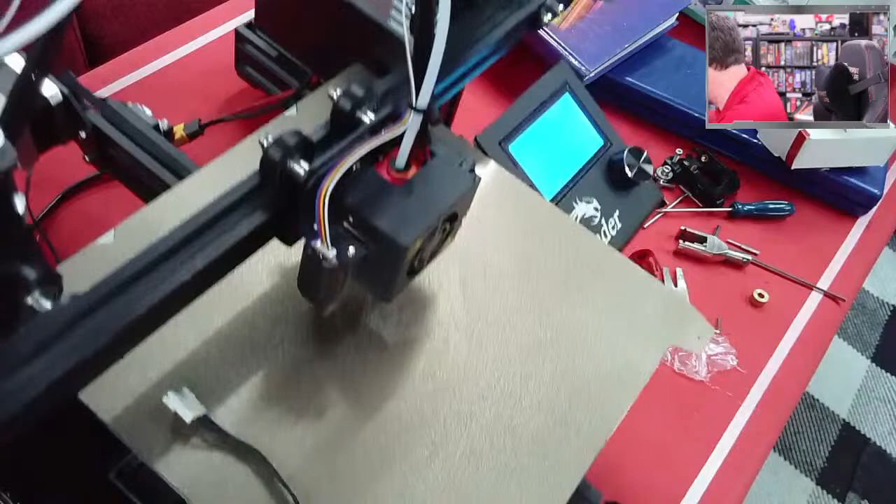Now, all that's left is to find out if I need this or not. So I can plug it in, turn it on so the steppers can move, and then we'll go over to our console.

So I'm over here, that one, over here, and it's not going to extrude any filament unless I have it heated up. Even though there's no filament in there, it will not let it move because it thinks that it's too cold to extrude filament.

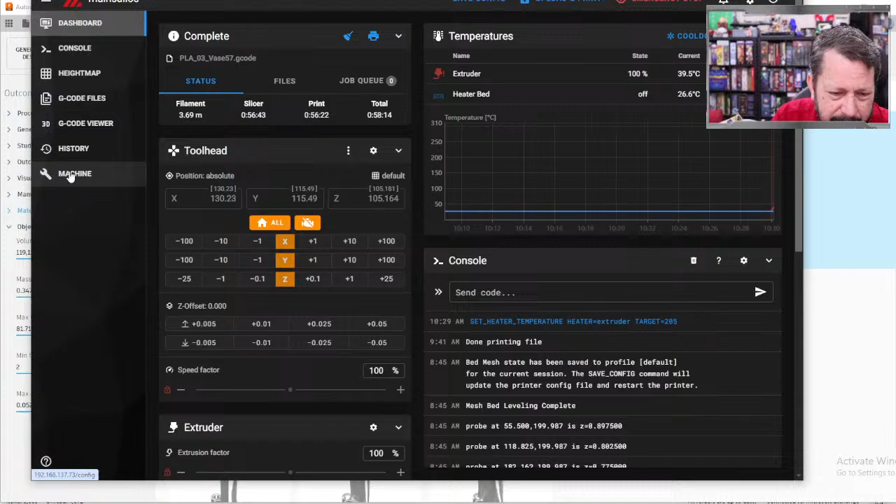Let's go ahead while we're at it, while we're waiting for it to heat up, go to our printer config and find the extruder. So rotation distance, let's just comment that out, and then let's calculate with a calculator, which I am not -- there's one. The circumference: we measured the diameter of our drive wheel being 7.4 millimeters. Let's just, pi times diameter is circumference, so multiply by pi.

23.24. Looks like we can use 3 decimals. 248 is our new rotation distance, and we will save and restart.

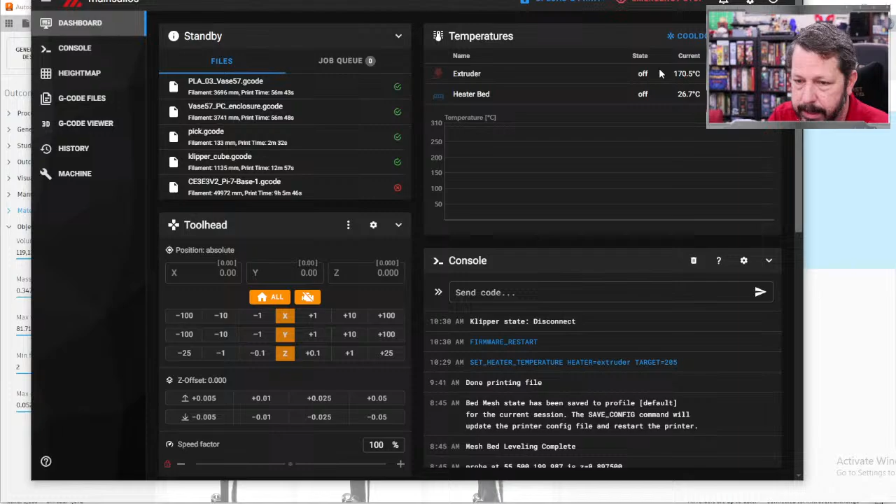We'll have to tell it to keep heating up because it's going to go back to 0. We're at 170. I think we set it to where it would extrude at 175.

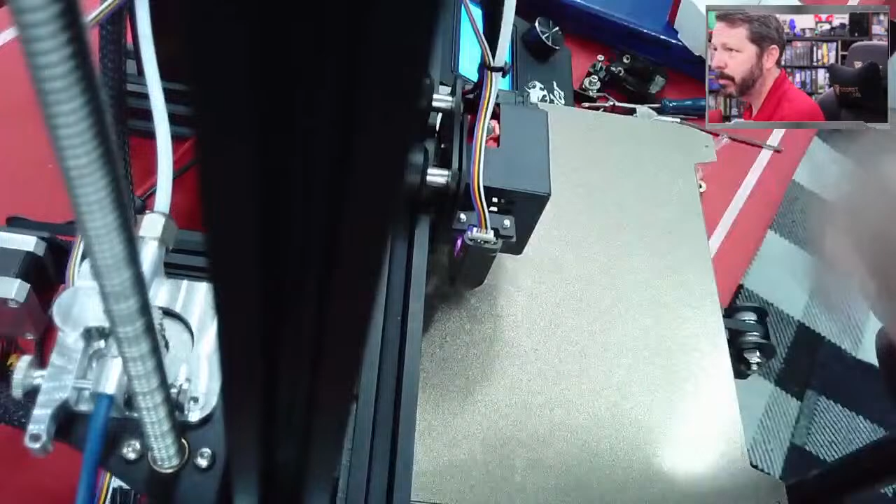So what we want to know here is, are we turning the wheels the right way, the pinch roller? Are we turning it the right way or not? So right now I don't have the reverser in there, and we're just going to extrude and see if it's extruding or retracting. So alright, that should be an extrude, but you can hopefully tell by the direction it's going that would actually retract filament.

So to fix that, you could reverse, I think, the middle 2 wires here, but you know what, we're just going to use this.

Now we're going to try and extrude again, and it's going the right way. Oh, so I think that sound was grinding on our Bowden tube. I must have it too close. Let's back it up a little bit. There we go, try it again.

Oh no, it's binding on something else. Or this is not quite lined up. I know it's a little blurry, we're kind of close to it. We might have to adjust that again.

Let's see if I can find the set screw for it. I think what's happening, could be wrong. Let me turn the motors off. Where's motors off? I don't know, I don't know where motors off is. I don't have a macro for that yet that I see.

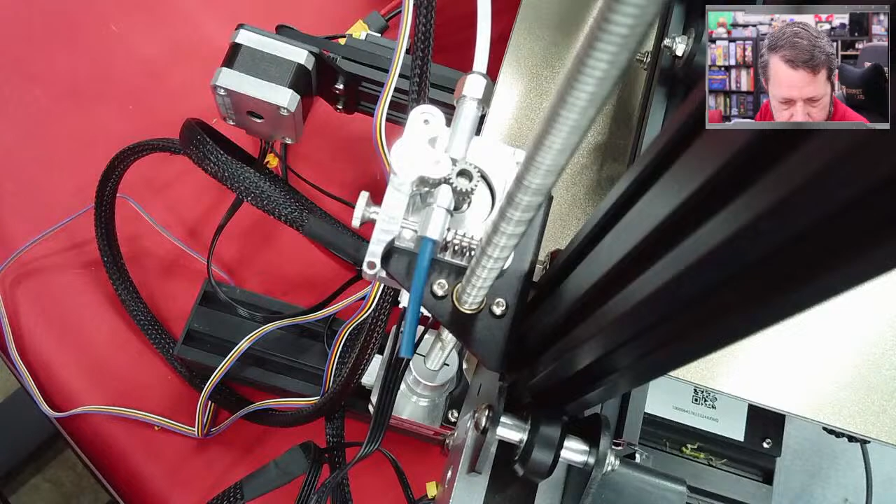Macros in print, I could do that. Maybe that'll turn them off. Nope, I'll just turn it off.

All right, I think it could be that our set screw is actually colliding, but let's try and adjust on that and see if that's a problem or not. So what is it hitting? I think it's hitting...

Oh, you know why? Because there's no filament in there. So I think there's not enough clearance between our set screw and the other roller. Let's try putting some filament in there. So I'll have to turn it back on and see if that will give it enough clearance.

So you can see how to load. Okay, let me give it some temperature so it'll let me do that. Having a little bit of issue because I haven't clamped that down yet. I may have to get that to clamp down first, but right now we'll just do this. There we go, we can always feed it that way.

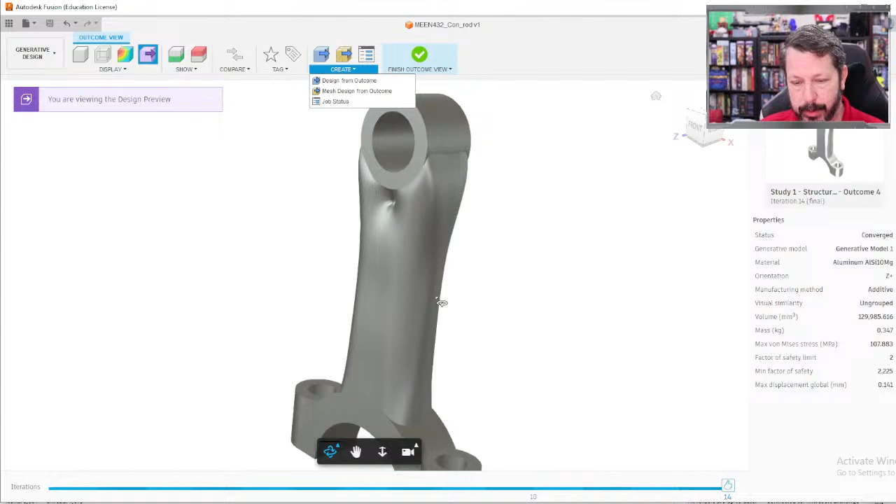From here, you can create a design based on this, or take a mesh. Normally you wouldn't want to just use this directly, you'd use it as a guide to actually engineer the part, but that's the idea of generative design in Fusion 360.

Oh, I didn't remember this. You can actually watch the steps it went through to get to these results, so maybe there's an intermediate step you like somewhere in there. That's kind of how generative design works. It didn't take that long.

The difference here is I simultaneously got 4 recommended outcomes. It looks like there are 5, and one of them it didn't like. But there are multiple outcomes because you're sending this off to the cloud versus using your local processing power to do this.

Would I use any of these as a connecting rod? I've seen some connecting rods that look similar to these, but you can at least get some ideas, a little bit of thought on, oh, I could do this.

Now these did not get very spider webby. Sometimes when you're really trying to lightweight a part, the things get really spider webby, but we put 10,000 pounds of compressive force on this, so it can't remove a lot of material and still function. Maybe if I put a lighter load on here, we would have gotten some of the more fancy designs that look spider webby.

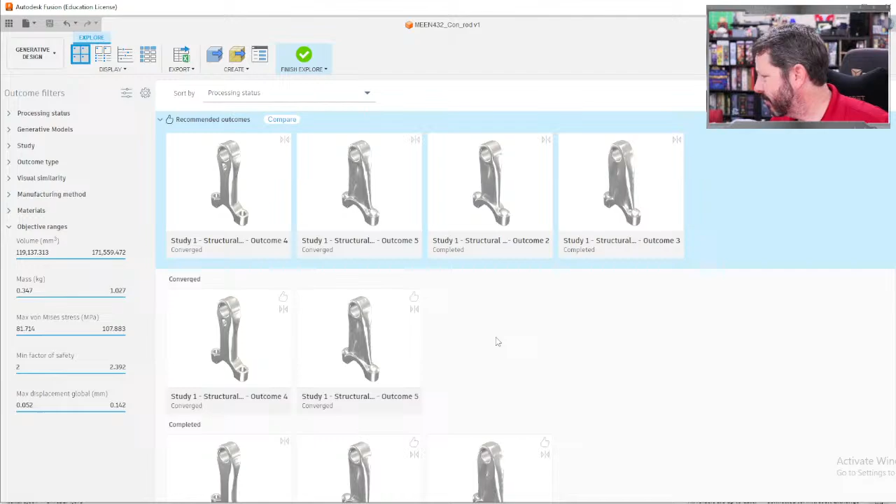Anyway, we have also changed out the feeder on our printer. I'm going to put it in the box, and we're going to start printing some of our filament. So this is our filament.

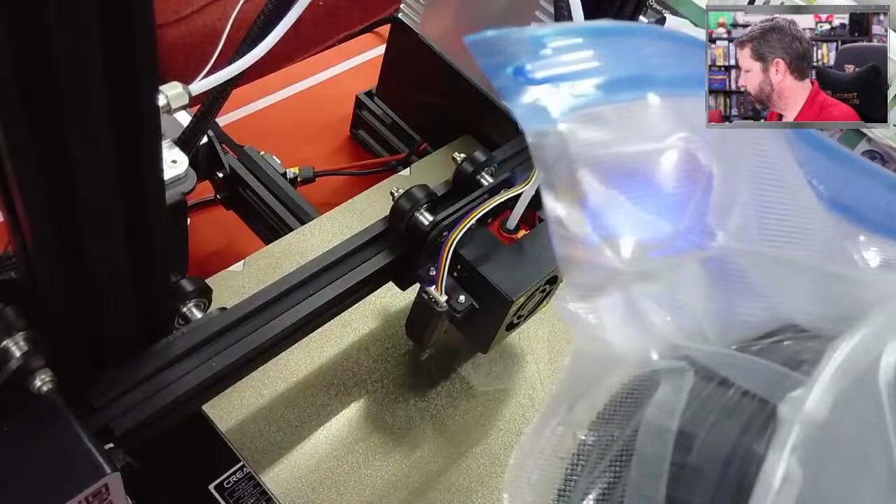This filament is very hygroscopic, so it wants to absorb moisture from the atmosphere. So I'm using this vacuum bag kit. It comes with a little vacuum pump and some number of bags, didn't say on the box how many. There were multiple bags, maybe 5 of these special bags with a port on them where you can vacuum seal filaments that are going to absorb moisture.

So nylons, polycarbonates, and TPUs like to absorb moisture from the air, particularly if you're in a place where average humidity is 70% at least. So that's a pretty cheap way. There are much fancier food vacuum sealer type things, but this is a pretty cheap $20-ish solution if you're trying to create a dry box type situation.

You can get a little dry box, put some desiccant in it, and suck the moisture out that way if you want. There are processes where you can bake the moisture out, but those require tightly controlled temperature situations, and you have to bake for a long time.

The problem ends up being that, first of all, you'd be baking plastic in your oven, which is generally not good. But a kitchen oven has trouble at lower temperatures, and it's easy to get high enough that it starts melting the spool itself, and you just end up with a big mess. So unless you have a furnace with nice temperature control that you can leave on for 6 to 8 hours, I would just keep your stuff in a dry box of some sort so you don't have to worry about it absorbing moisture.